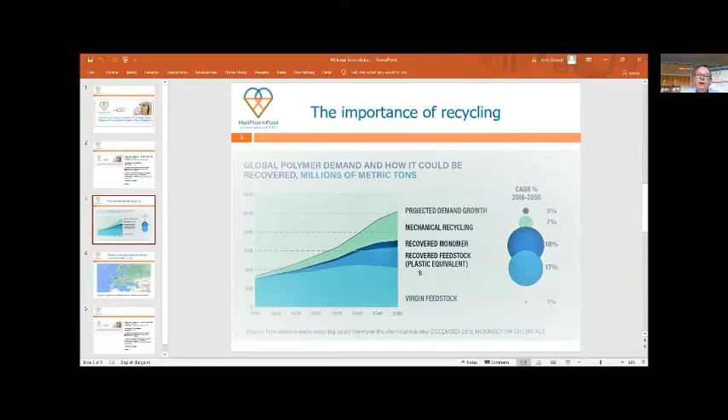And then when you apply this to the MedPharmPlast sector, it's even, I think, more interesting because in MedPharmPlastics, what we know is when you mechanically recycle, you're not able to use it again for the same application. And so this is also why we think that chemical recycling maybe is of particular interest in the MedPharmPlastics sector, because it's through chemical recycling and renewables that you're able to enable circularity. So that's why it's important.

And then that being said, it brings me to our first speaker. And if I may kind of set the scene for our first speaker. Our first speaker is Lacey Linney. She works for the company Cytiva, and I'll let her, if she wishes, tell a little bit more about Cytiva, its origins coming through GE over the years. And she's responsible for evolving plastic and design and sustainability, leading these efforts at Cytiva. And so she's the perfect person to come here today to talk to us about design in sustainability in MedPharmPlastics.

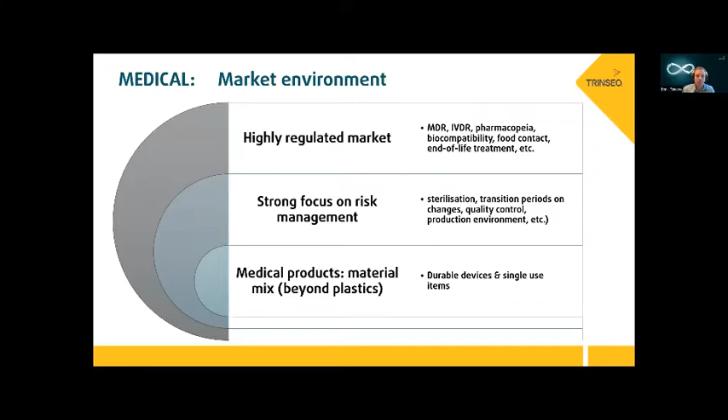Now, these are some numbers I've picked from Plastics Europe, dating back to 2019. What you can see here is the European consumption of plastics split by polymer group. And no surprise, the biggest fraction is polyolefins. What I'd like to share with you today are some insights on polystyrene, SAN and ABS products we manufacture, together with polycarbonate, and last but not least, PMMA, as well as other plastics.

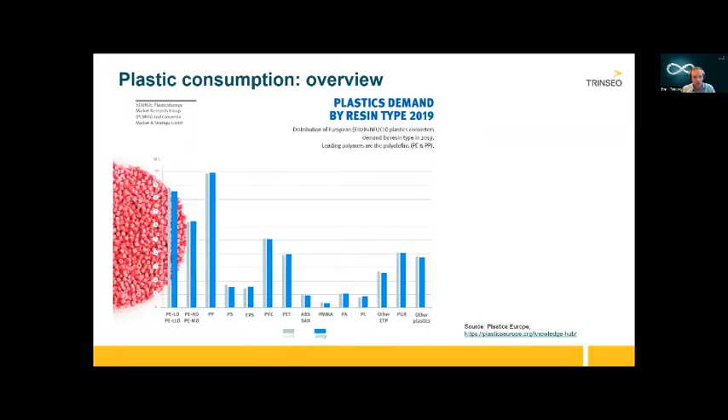It wouldn't surprise me if the ratios of plastics used specifically in medical wouldn't differ significantly. Obviously, the amount of plastic used will be significantly smaller, but not the ratio, I would say, than it is displayed here. So obviously, when it comes to circularity, a lot can be done looking at polyolefins, and it's no surprise that there is a lot of traction happening there. But with my presentation today, I would like to share some insights on the styrenic spaces, which, although they're small, are still mentioned here, so I think they have a valuable contribution to play.

First of all, I'd like to share with you that when it comes to styrenics products, Trinseo is part of an industry-wide consortium called Styrenics Circular Solutions, which brings together partners from the supply chain around polystyrene. You can have producers of styrene monomer, companies who polymerize it, converters down to recyclers, with the idea to convert post-consumer polystyrene into virgin polystyrene again. It was started in 2018, and we believe Trinseo plays a vital and an active role in this consortium.

Why do I hammer so much on polystyrene? Because it is so core to our business, and it gives a nice example of what can be done with the different routes. Why is that the case? Well, if we look into polystyrene, obviously we have the linear business model that is familiar to everyone here, and the circular business model is then, let's say, the expansion to that.

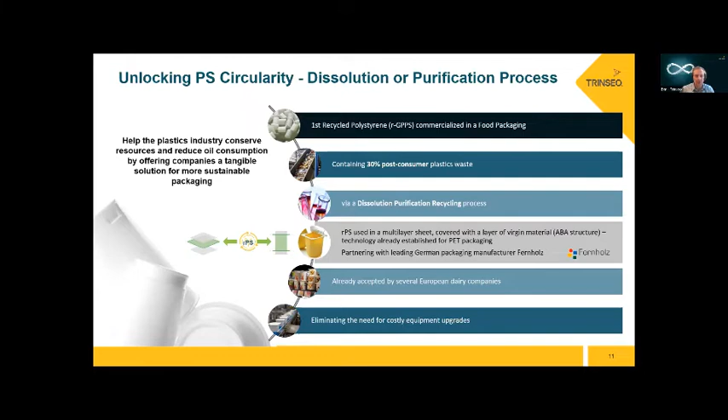Now, it's not only Trinseo that invested and discovered that chemical recycling of polystyrene is a great advantage of this polymer. There are multiple other players throughout the industry who are doing the same. You can see here, first commercial plants are coming online in 2022, 2025 from different players, which will make polystyrene a fairly sustainable polymer.

In total, there will be around 43 kilotons of recycled styrene monomer available by 2025. And together with the dissolution and mechanical recycling, the total amount will be about 150 kilotons of recycled polystyrene. That's a lot of medical devices you can make from them. So I think this is really picking up, and you should see more and more coming on board around recycling of polystyrene.

Now, obviously, when you have the styrene monomer, you can then decide what to do with that. And one idea is to use it in copolymers, such as SAN or ABS or SMMA, if you like, or you could use it into a rubber, a styrenic-based rubber, or even into thermoset rubber, if you like. So there are multiple options opening up with the creation of a recycled styrene monomer.

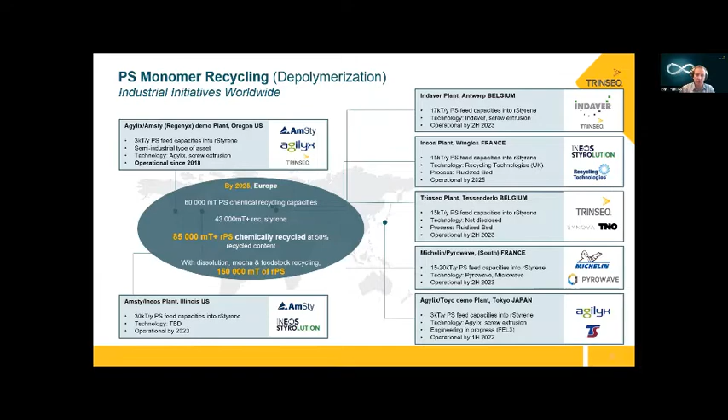Not only is there circularity achieved within the styrenics, we also started to generate some environmental data within the Styrenics Circular Solutions. And as you can see, from an environmental point of view, it's no surprise that the mechanical recycling has the greatest benefit in terms of CO2 savings. In fact, the super clean mechanical recycling reduces the CO2 footprint versus a virgin polystyrene by 80%. Dissolution and depolymerization also have a great benefit when it comes to CO2 savings.

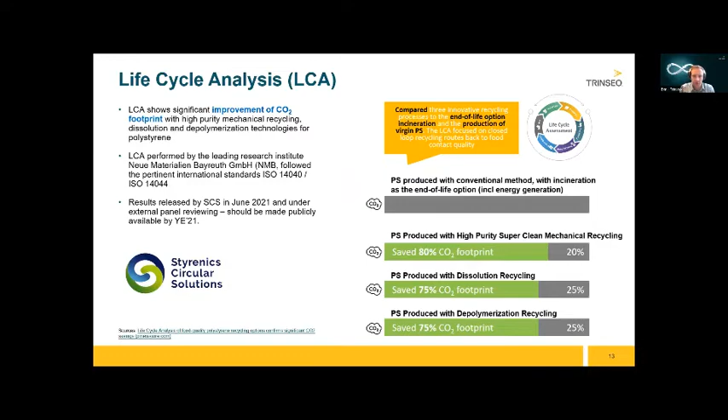Now, we've touched on one idea about circularity, how to bring that into this specific polymer. Why did I start with polystyrene? First of all, it's the first polymer that we've greatly investigated, and we've made a commitment to invest into a first depolymerization plant. There will be other polymers where similar recycling ideas and concepts will be evaluated.

Starting from the well-established mechanical recycling for industrial application, I think it's good enough for a lot of applications. That's also where the image about recycling comes from. It tends to be in rather dark or black colors. And for some applications, it might be good enough. But we are today talking about medical applications.

What I've tried to bring across to you today are the new options that will come online, such as super clean mechanical recycling, the dissolution with up to 30% of post-consumer recycle being consumed here, and also depolymerization of polystyrene, where we achieve a pure virgin-like styrenic monomer. Now that already helps us to bring circularity into the existing business. And in that respect, I think plastics are fantastic materials if you compare them to metal or glass or others, because in general, there's a lot less resources and energy used.

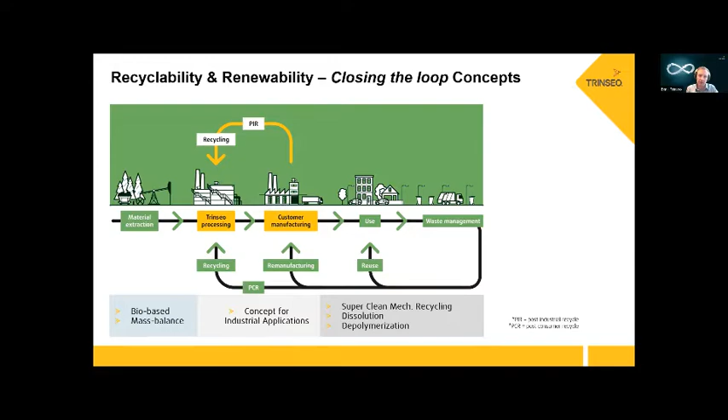What is fairly new is the mass balance concept. And for those who are not familiar yet, I'd like to give you a few ideas about mass balance. Essentially it is a concept copied and pasted from green energy. What we have today is a given infrastructure. And of course, what you can do is build an extra infrastructure with sustainable sourcing. But as you can imagine, that is not very efficient, because at the end of the day, you would have the double infrastructure with the double investment.

So instead, and that's the second idea here, most of the polymerization processes are continuous processes. So how do you differentiate when you are, let's say, 5% or 10% renewable resources? It is not possible to detect a fossil-based versus a chemical recycled styrene monomer, for instance.

So in order to have a clean book, the idea is to have the materials mixed physically, but kept separated in bookkeeping. It's the same thing when you have an energy provider at home and you switch on the light. It's not green energy that then runs through your circuits. It's just the amount of consumption you as a consumer use will get then added into, let's say, the energy soup. It's the same idea here.

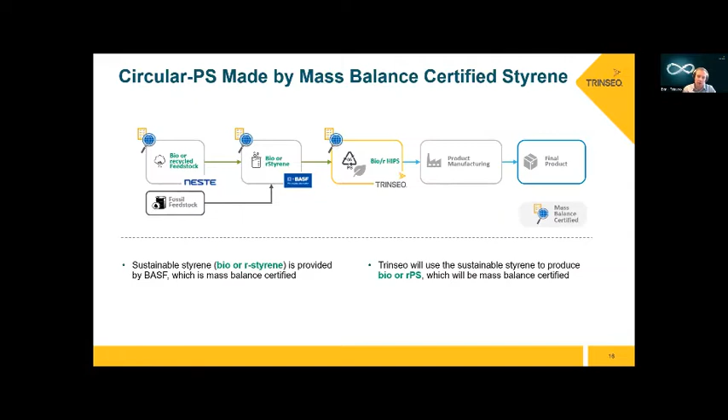monomer. And then that styrene monomer has the same specification as the conventional styrene monomer has. And then with that, you can make polystyrene, or you could use it in many, many other applications where styrene monomer is one building block.

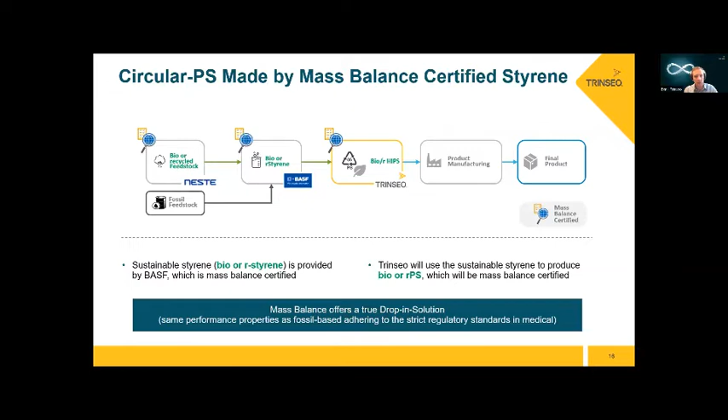The nice idea about mass balance is that it is considered to be a true drop-in solution. What do I mean by that? It has the exact same performance properties and the same specification, and it complies with the same strict regulatory requirements as the conventional does. Why? Because the monomers that we add into polymerization plants have the same specification. And that is a very appealing route to bring sustainability into the medical beyond mechanical recycling, clean recycling, super clean recycling, and dissolution.

So, as a summary, we have seen that polystyrene is already available through dissolution today. It is on the edge to become certified with food contact compliance. And it is also available through a mass balanced bio-based solution, or attributed mass balanced credited, you could say.

ABS is then the next platform where we believe this will be of benefit. With bio-based styrene and bio-based acrylonitrile, the first CO2 footprint calculations we made internally demonstrate that a total of 71 CO2 footprint reduction can be created. This obviously opens up with more chemical recycling coming on board, and there are more and more options for the use of recycled styrene monomer.

Polycarbonates, where chemical recycling is more challenging, most likely will be available short-term with mass balance. And also TPE, you can see the link with styrene monomer, will be available not only with today's bio-based versions. Think about bio-based TPU, where the polyol is bio-based, or think about TPE, where the polymeric phase can be sourced bio-based, but also with mass balance in the future. So you can see when it comes to circularity, more and more options are opening up.

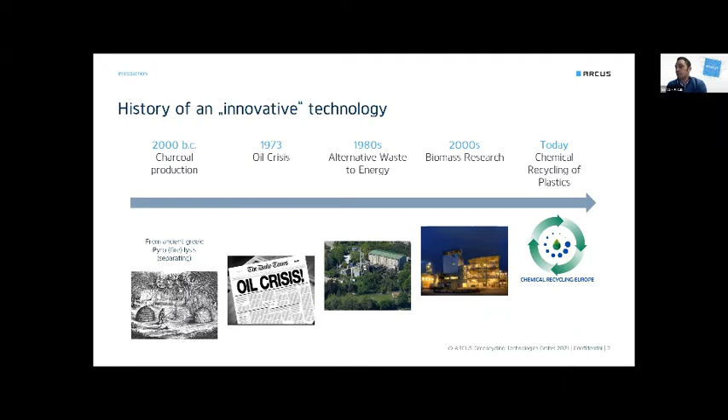So I'm an engineer, so I need to go a bit technical on this. So let's have a look at which kind of plastic can be used in pyrolysis processes. Of course, we look mainly at polyolefins, but also at polystyrene. These are preferred polymers we can convert into liquids as new feedstock.

But of course, if you are dealing with waste, then you need to deal with contaminations. And therefore, we need to have a look at typical non-hydrocarbon polymers: PET, PC, PVC is an issue, for instance. And in waste, but also in plastics themselves, you always have additives, fillers, pigments, flame retardants, as already mentioned by Ben. And also, if you look at packaging waste, there might be very different kinds of contaminations like food waste, biomass, sort of inerts, metals, and so on.

This might not be the case for medical plastic waste coming from your production side, but if you go to hospitals, then of course you might also have this kind of contamination in your mixed plastic bag. So what happens to mixed plastic waste within a pyrolysis process? Pyrolysis is a thermochemical process, so you need heat from an external source. You need to go high with temperature, so some mechanisms take place.

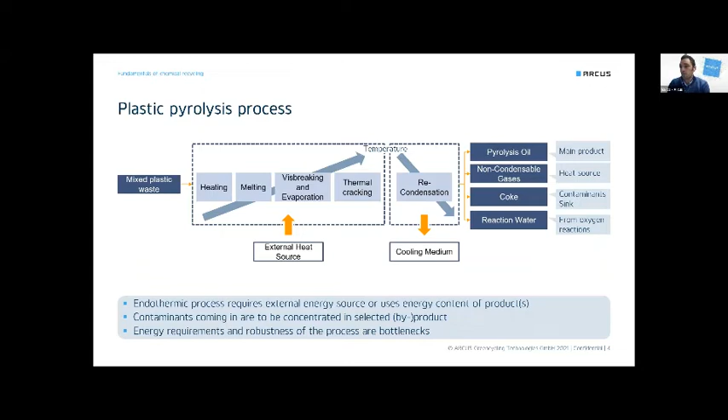So moving forward, what do we have with the pyrolysis process? Let's have a look at one feedstock. What we always do is an elemental analysis, looking specifically at contaminants, so nitrogen, oxygen, sulfur, chlorine, but also inerts like ash. And you see that's a case for a medical plastic waste where contaminants are relatively low, but still too high for new medical applications.

And on the right side, you see some pictures of different medical plastic waste in different forms. You see some packaging and some devices at different particle sizes, after pretreatment, which is sometimes required for a chemical recycling process. And finally, on the bottom, you see a typical distribution of products. What is important to mention here: more than 50% of your input, including contaminants, is converted into the pyrolysis oil, which is finally the recycled feedstock for further conversion afterwards.

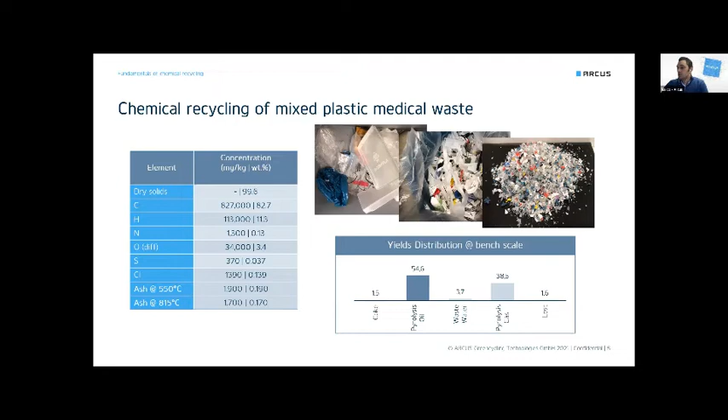So Ben already talked about the mass balance approach, and for pyrolysis, mass balance is fundamental. There is no other way to recover recycled feedstock. If you look at mixed plastic waste, what happens to pyrolysis oil, or what should happen to pyrolysis oil? It should go into established infrastructure

from the petchem industry, like steam cracking, which is the source of ethylene and propylene used for the production of PE and PP. There is only one way to convert pyrolysis oil, and it is to co-feed with fossil naphtha. There is no alternative due to the infrastructure. A steam cracking unit converts millions of tons per year, and therefore there is really no alternative to this one.

So what happens in a cracking facility? We look at steam cracking, which is the main source, but other cracking technologies are also available and coming up in the future. So you go together with naphtha into the steam cracker, and you produce your monomers: ethylene, propylene, C4, C5, but you also produce some pyrolysis gasoline, which is a C5 fuel that cannot be used as a source for new polymers, some fuel gas, and of course you always have some losses during a cracking process. Ethylene and propylene can be used for polymerization and therefore go forward to extrusion and new plastics.

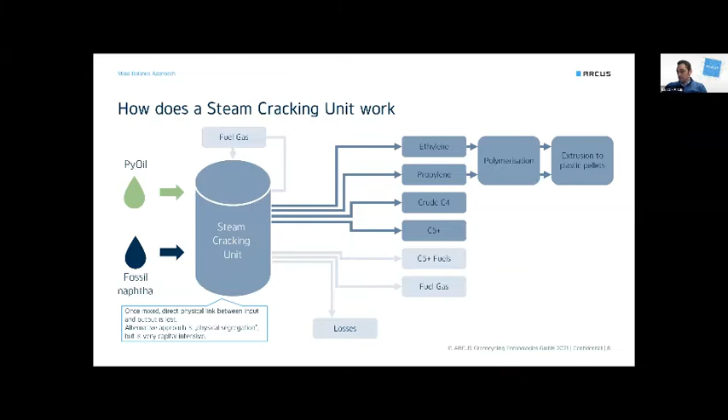So the next step would be to discuss in more detail how to implement the mass balance approach for recycled feedstock. We are discussing four possibilities at the European level. The first one is a technical one. You mix 10% of PyOil with 90% of naphtha. You have a yield distribution. We may assume the same distribution as for naphtha, and therefore 1 of 10 will be in the first monomer product, so we will have 10% recycled content. The same for a second product going as feedstock for polymerization, and then some part of the pyrolysis oil goes to fuel, which cannot be considered recycling at the moment.

The other extreme is free allocation: you have 10 of 100 pyrolysis oil, and you assign all 10 to one polymer monomer. So you might have 100% recycled content. This excludes the real yield distribution, and therefore it is not to be considered a way to go, because of course you don't produce 100% monomers out of pyrolysis oil.

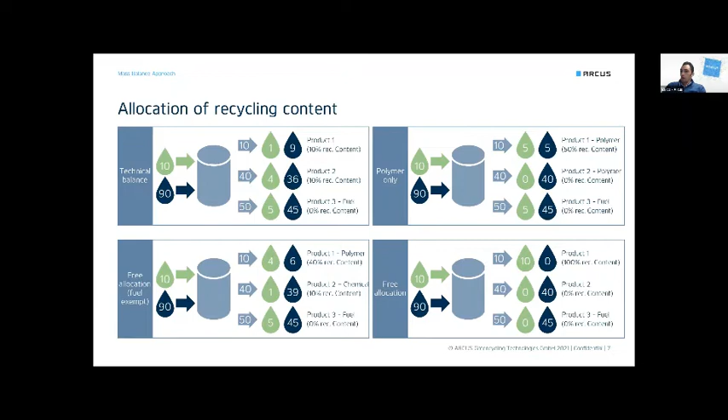But let's have a look at the medical waste supply chain, at what can happen to your materials. You produce plastic medical items. You have your quality control. If it passes quality control, it goes into the hospital and is used there. There you have collection of waste, and then an end-of-life conversion process. In Germany, mixed plastic from hospitals goes directly into waste incineration. So there is no real option for mechanical recycling.

Going back to production, if it doesn't pass quality control, it's discarded as production waste. It's collected at your production site. In Germany, for instance, there is a regulation for commercial waste. It goes through a typical sorting facility, and the part of your plastic which can be mechanically recycled will be recycled, normally never into a new pharmaceutical application, so we call it downgrading.

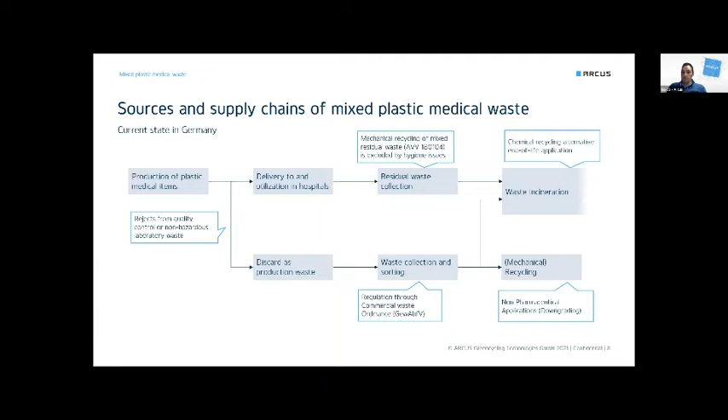Where does chemical recycling fit here? We can take what today is mechanically recycled. We can take what today goes to waste incineration, and therefore to establish chemical recycling of mixed plastics, you need to compete with these two established technologies. My next slide looks at LCA from the point of view of end-of-life technologies. This is a screening LCA we did at Arcus a couple of years ago, where we compare our technology with waste incineration and mechanical recycling.

Each technology receives credits either for production of new feedstock, as in case of chemical recycling, new plastic for mechanical recycling, and electricity or heat mainly for waste incineration. And then if you look at the greenhouse potential there, you see mechanical recycling is better than chemical recycling, and therefore we do not want to compete with mechanical recycling. They have a better position, and it's worth for us to say, okay, give us your residues, and not take the potential feedstock for mechanical recycling.

But if you compare chemical recycling to thermal recovery or waste incineration, there is a huge advantage for chemical recycling technologies. So we don't want to compete with mechanical recycling. We want to compete with thermal recovery or waste incineration.

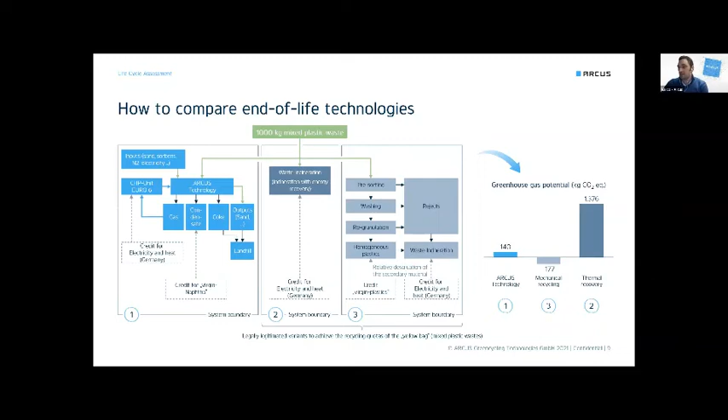So let's have a look at the legislative framework. What are the tools of a chemical recycler? So first, you would like to have a plant, so you need an authorization of construction. In Germany, it's under the National Environmental Protection Law, which regulates waste conversion plants, and makes things quite difficult for chemical recycling, because at the input we have waste, and in the second part of our plant we are a chemical plant. And regulations are a little bit different and make authorization very complex. At Arcus, we received our first authorization this year. It took us almost 2 years to get to it.

Another tool is REACH registration. We produce chemicals, so we need to go through a REACH registration so we can market our materials. Third, very important, a REACH registration is not enough to sell your material, so you need an end of waste status of your product, which is released at local level. So we work at European level, but we also work at local level with the mayor of your city, because he is in charge of putting the signature on your end of waste status. That makes it, of course, quite complex. And of course, we generate an intermediate, and therefore the end of waste is necessary because petchem cannot receive waste as an input.

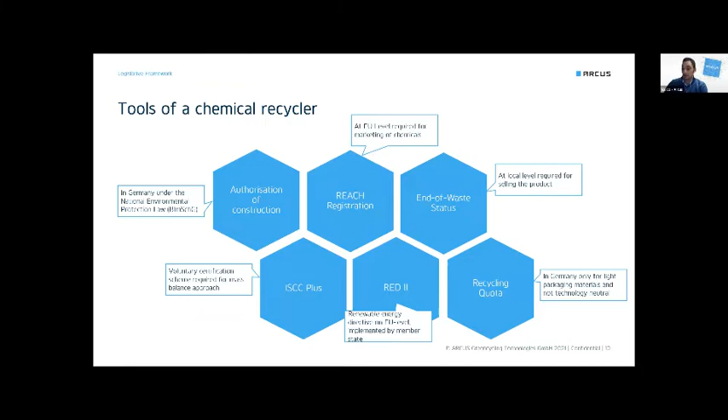So let me give an insight on Arcus. Arcus was founded in 2016. It's a German-based startup. Till today, we are 6 employees, so we are very small and quite flexible. We have a cooperation with KIT, where we designed our process out of existing contaminated plastic waste. So we took whatever is available, more or less, because in Germany, at least, you won't get feedstock out of sorted plastic. So there is no way to get the material that today goes to mechanical recycling, and therefore we need to look at contaminated plastic. We add some additives to remove contaminants. For instance, chlorine is a big issue.

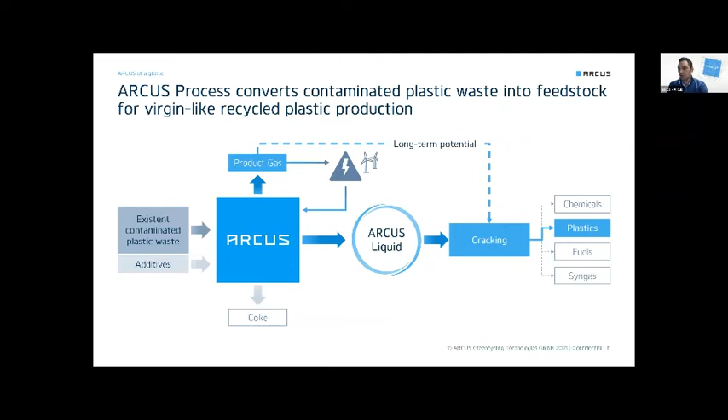We generate products and byproducts: coke, a contaminant sink, and a product gas made of olefin gases, today used in our process for electricity production. But in the future, in 5 to 10 years, and depending on the scale of future plants, it can also be used as a feedstock for new plastic again, because as I mentioned, the product gas is mainly made of olefin gases, which are monomers for new plastic production. Our main product is a pyrolysis oil. We call it Arcus liquid, and it's REACH registered. We have the end of waste status, and so we can market and sell to the petchem industry, which feeds it into their steam cracking facilities and produces monomers for new plastic.

We are currently building our process demonstration unit in Frankfurt, in Germany. It's a full-scale plant. When it goes to the reactor size, it has a capacity of 4,000 tons per year plastic waste input, which generates about 60 to 65% pyrolysis oil, which means 2,500 tons per year. The plant is full electric, so we are ready for green electricity when it comes at a good price.

The plant is designed to get really contaminated plastic waste. We have more than 600 measuring points, so we can balance the plant perfectly. We consider that we have a quite low energy requirement compared to other technologies. I've shown you a screening LCA. We are going for a full-blown LCA once the plant is live.

And that's on the right hand side. You can see what's coming up next. Plant started to be constructed Q2 this year. We are almost done. We will be ready for commissioning by the end of Q1 2022, and we are planning to have 2 more commercial scale plants live in 2024.